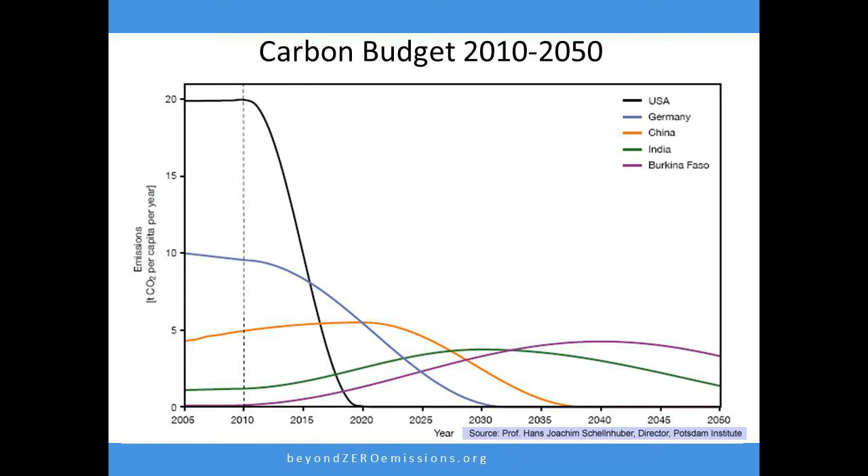Just some quick context: Angela Merkel's climate advisor, so that's the Conservatives in Germany, and the EU's climate advisor is Professor Hans-Joachim Schellnhuber. He's the head of the Potsdam Institute for Climate Research, and he actually released a paper last year where he showed that if you wanted to have a 67% chance of avoiding 2 degrees Celsius, which many say is too high, because regionally in Australia that could mean 4, 5, 6 degrees average increases, you needed to decarbonise an economy like the USA by 2020. Now Australia has the same sort of emissions profile as the USA.

So we didn't want to sit around and debate the topic because we thought it's pretty important to get on with the job. We put together a crack team of young, smart, switched on engineers, physicists, people who work in industry, they work in the fossil fuel industry, they work at refineries, they work in major engineering companies, and together they wanted to design the future that they wanted to work in.

So equally at the same time there's another group walking the halls of parliaments around the country, and they're in and out of politicians' offices, but unfortunately it's not us, it's the Can't Do campaign. And the Can't Do campaign, the oil and gas industry, the generators, the coal exporters. And they sing the Can't Do mantra, and the Can't Do mantra is that renewable energy can't supply baseload. Renewable energy is too expensive. Renewable energy will wreck the economy. Renewable energy will cost jobs.

And we've got this fantastic model just for showing off. I'll show you what that is. It's a solar thermal plant. And the big key to an Australian 100% renewable energy plan is solar thermal. And that's the real one, and that's our model, 400 to 1. So that's a baseload solar thermal plant, and I'll tell you how that works. So when I say baseload, I mean solar power all through the night, solar power around the clock. It's 24-hour solar power.

So here's how it works. A sea of mirrors, a field of mirrors surrounds a central tower. The light of the mirrors, each individually tracked mirrors, is bounced up to the top of the tower, where a fluid travels up the tower from the cold storage tank. There's 2 tanks at the base of the tower. So the liquid is molten salt, it's industrial fertiliser. It travels up to the top of the tower, receives the light from the field of mirrors, we're talking 17,000 mirrors, say, and it's then banked in the hot tank. So it starts at 290 degrees in the cold tank and arrives at 565 degrees in the hot tank. It's the same temperature that a coal-fired power plant works at.

So it's like Grandma's thermos. All the heat is stored up in a big tank of molten salt, and then any time, day or night, that you need electricity, water is run past the salt through a shell and tube heat exchanger, flashes to steam, and drives a conventional turbine, the same turbine in a coal, gas or nuclear plant. So for grid operators, it interacts with the grid exactly the same as the kind of power plant they know how to run. So it's 24-hour solar power.

Now this is what the molten salt looks like when it's not molten. This is before the big melt. It's just potassium nitrate and sodium nitrate. Here I'm holding the potassium nitrate. It's pretty safe. If you don't inject it, you're okay. Wash your hands afterwards. You don't need an EPA licence in the United States because it's industrial fertiliser, so it's accepted to use and it makes planning, fast tracking pretty easy.

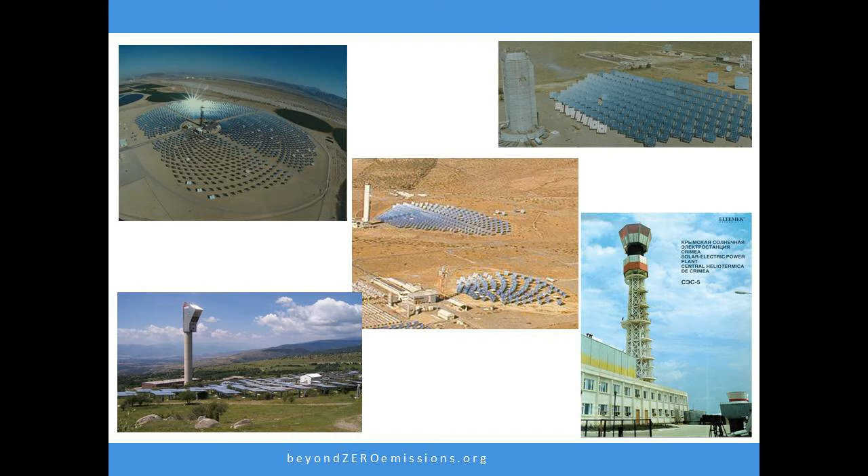So here's the point that you need to take note of. Unlike wave, there's a great company here called Carnegie, or geothermal, hot rocks geothermal, this is not something that's in test phase, development stage, commercialisation opportunity. This was prototyped in 1980. So the USSR built this really USSR-looking tower in 1978, 5 megawatts. The Americans had to one-up them by doubling it at 10 megawatts in 1981. And the French just got smart and they made a molten salt tower in 1982 and had 4 hours of storage to show that you could run it after dark.

Follow on to 1996, the US, not to be outdone by the French, added more and more mirrors and added 4 hours of storage to their test plant, their commercial operation test, and it was run together with Sandia National Laboratories. They're the guys who made the nuclear bomb in Albuquerque, New Mexico, Lockheed Martin, Bechtel, Boeing. So not hippies, we're talking defence contractors, people who sort of bomb people and on the side they do solar. Okay? So if we can encourage them to do more solar and less bombing people, it'd be a good thing.

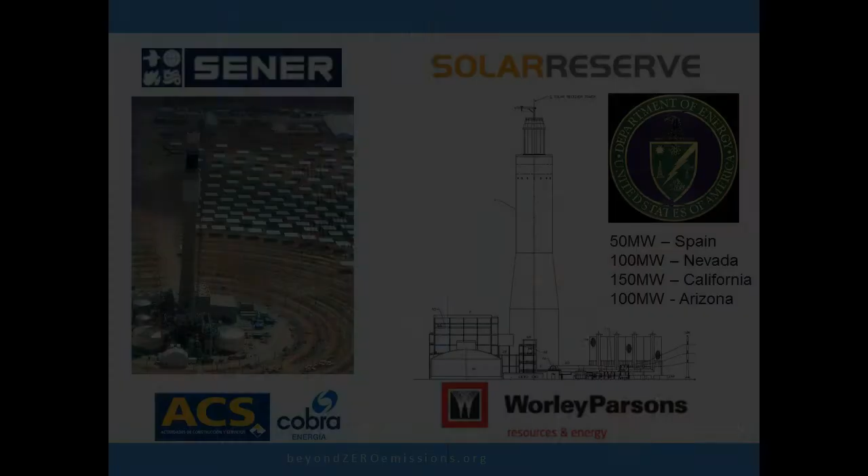So out of that, we've got Sener in Spain, and Sener is Spain's biggest engineering company. They're like Worley Parsons plus a bit of Lockheed Martin. They do aerospace and regular engineering for the oil and gas industry. And they're building the solar thermal plants in Spain out of that US Department of Energy program. And their construction contractor is ACS. And guess what? ACS owns Leighton Holdings. So it's not hard for us to do the technology transfer to Australia to build these, to start rolling them out. Because if Leighton's parent is the biggest builder of solar thermal plants in the world, then we can do it in Australia.

SolarReserve, on the other hand, United Technologies Corporation, 16th biggest company on the NASDAQ. Pratt & Whitney is the division. They keep half of the world's jet planes in the air.

If you trust Pratt & Whitney with your aeroplane flight, you can trust them with your power sector. And their engineering contractor in the United States is Worley Parsons. So another strong link here to Australia. So again, we can do it in Australia. So there's lots of companies.

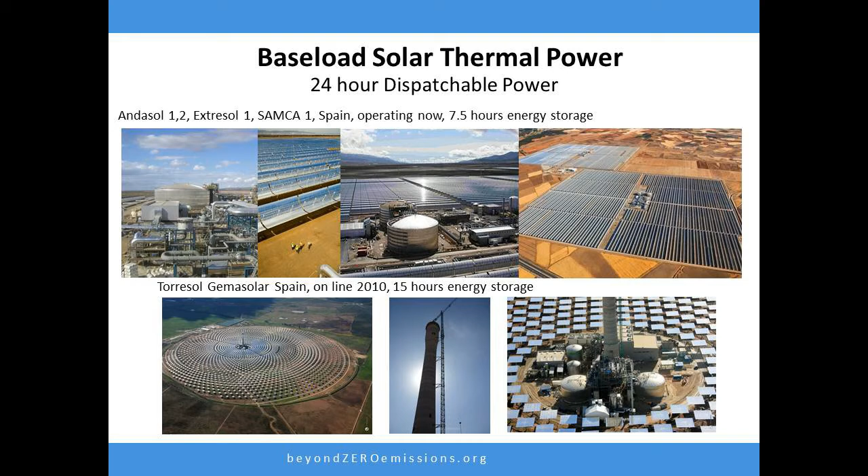There's about 10 plants operating with 7.5 hours storage. They're called parabolic troughs. They don't work so well in winter, further away from the equator. So we've gone with plants like Torresol's Gemasolar, which is down the bottom here, which supports 15 hours storage and has a 75% annual capacity factor.

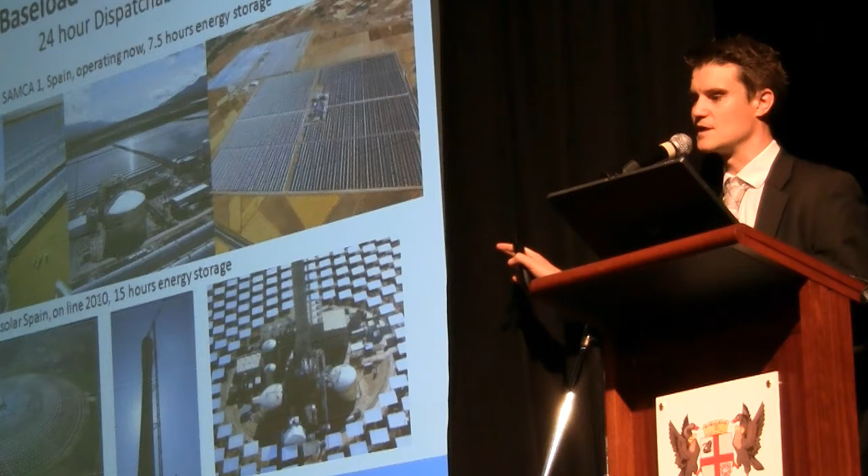So to compare that to, say, New South Wales black coal plants, they average 63% capacity factor. These plants do 6,500 hours out of 8,760 hours a year. So this is more base load than New South Wales black coal plants. So it runs around the clock most of the time, take it out for maintenance and so on.

So they've moved away from photovoltaic and into solar thermal. And they want that dispatchable power. They want the 24-hour ability to provide the complementary power to wind. $20 billion over the next 3 years. This is not tut-tut a few solar panels on a local school. This is a major industrial mobilisation.

So we wrote the Stationary Energy Plan to show you can do it. It's endorsed by the former Chief of Defence, Peter Gration, by Robin Batterham, the former Chief Scientist of Australia under Howard, and many others. And here's a quick rundown of the actual energy that we deliver in 2020. You can see our starting point here. The blue area is existing electrical services like the aluminium smelter and the projector, and we have a major energy efficiency program which we're writing about currently in our Buildings and Transport Plan.

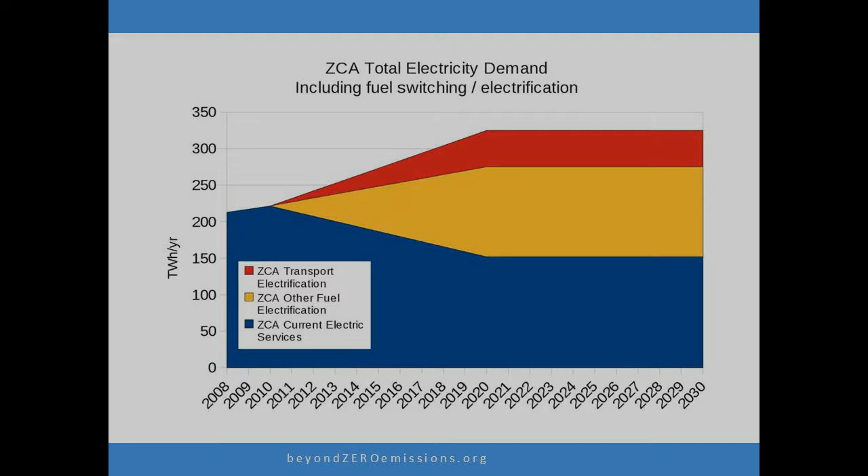And that energy efficiency program allows us to reduce our absolute delivered energy out to 2020, so we're mining savings in energy. We'll still be using more energy per head of population than Germany in 2020. Now you might think, well, those Germans live in caves, if a Mercedes is a cave, and they've got the second biggest car manufacturing industry. They do aluminium smelters, they've got steel mills, so they're a big industrial, diversified economy. They can be very powerful and very heavy industry on less energy than we'll be using under this plan in 2020, so we can do it too. We're not that hopeless, right? I mean, we might have a complex, but I don't think we're that hopeless.

So here in the yellow is other fuel electrification. That's switching our current gas, space and water heating and industrial heat to electricity. So we're using renewable ambient heat or heat pumps. So you buy 1 bar radiator worth of heat and you deliver 5 bar radiators worth into a premises using the best Japanese high efficiency heat pumps and so on. And that's the orange sector.

And in the red sector, it's transport electrification. It's rolling out new rail in our cities, significant rail rollout, not seen since the turn of the century, using modern 100-man equivalent automatic track laying machines and electrifying our vehicular fleet. So upgrading our car manufacturing plants to build pure electric or plug-in hybrid electric vehicles.

So we're actually delivering more electricity in 2020 overall, but that's because we've now accommodated all energy. That's the 3 sectors: the liquid fuels for transport, which is currently oil and gas, the gas used for space heating, domestic and industrial, and water heating, and the electrical services.

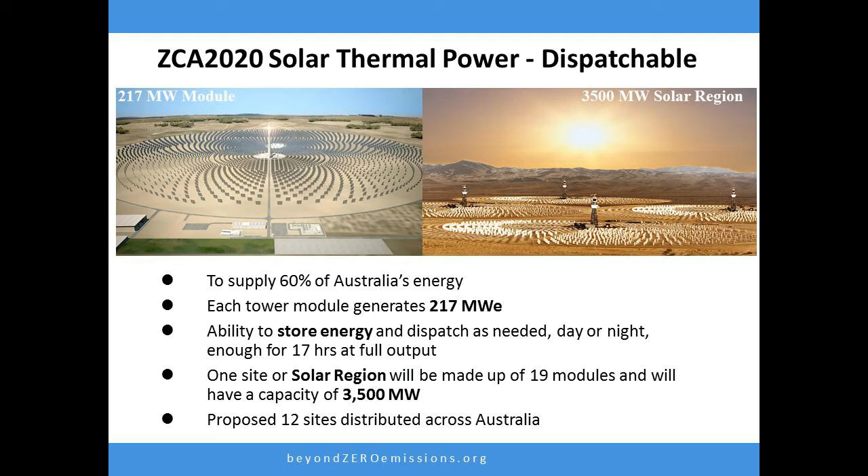So here's what it looks like. 60% of Australian energy from molten salt power towers. Think of a huge smokestack without the smoke coming out of the top. Think about 19 of them in a solar region like Kalgoorlie, where we're going to speak about this tomorrow night. 19 towers. Currently, if you go to Latrobe Valley in Victoria, there's 22 towers with smoke coming out of the top. This is a region, 12 around the country, 19 towers, surrounded by a sea of mirrors.

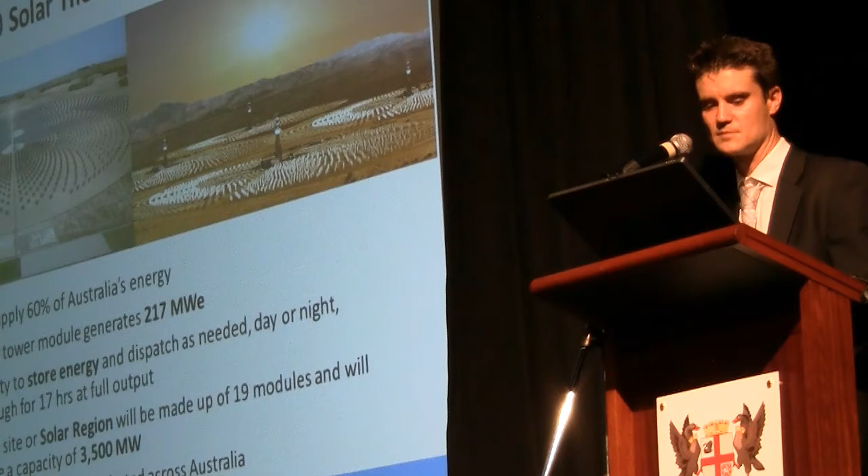To give you an idea, from the base of the tower out to the perimeter is about 2 kilometres. So if you go any further than that, not enough light strikes the tower, and that gives you a 217 megawatt net tower. Or to compare it, people always like to quote the gross amount, 250 megawatt tower. So each module, each region will have 19 of these towers, 12 across Australia.

On the wind front, just 6,500 turbines at 23 sites will give us what we need. These are 7.5 megawatt wind turbines from Enercon. They're about 3 times the size of what's currently installed in Australia. And I'd argue you go with the biggest turbine because there's no reference on the horizon. A big turbine's a big turbine's a big turbine. Why install 2 megawatt ones when some sectors of the economy don't like the look of them, when you can install a 7.5 megawatt one that looks exactly the same and produces 3 times the power? Because your eye can't tell the difference.

So 6,500 of those, and each wind region would have 2,000 megawatts, or about 270 to 400 turbines. We've already got proposals for wind farms that big in Australia. And this is what 7.5 megawatt turbines look like. Like I said, they look pretty small. There's me in the foreground, and they're a couple hundred metres behind me. And I really like them, actually.

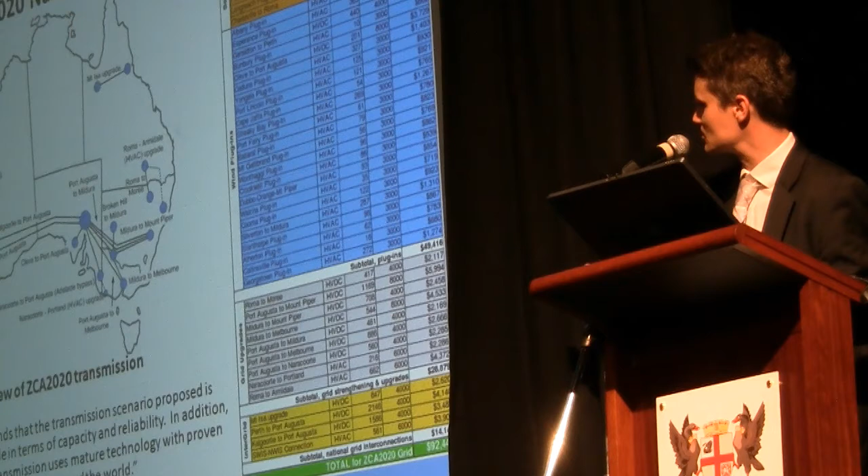And we designed a grid with Sinclair Knight Merz, and they did a review of that, and you can see that we've linked the west to the east. Currently in the East Australian grid, electricity flows south from Queensland, where they've got a surplus of energy generation, towards Victoria and South Australia. Under this system, we're actually sending the power from the west into the east, with net generation in the west, and we're exporting towards the east. And we basically showed that you can cross the Nullarbor and only lose 3% per 1,000 kilometres using high voltage DC cables. So pretty good efficiency there. Now version 2 will be reviewing that and seeing if we can optimise our transmission system.

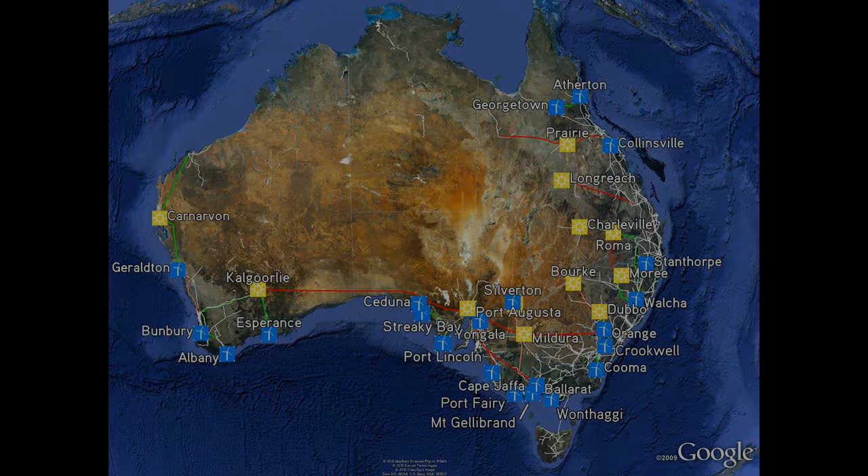So this is the energy system I'm saying for the whole of Australia that we could have in 2020 if we chose to do so. So that's our choice. If we choose to do it in 2025, we could do it as well. If we run the project out too long, we lose economies of scale and the price goes north. You've really got to build them like you build roads. One project after another, so your workforce moves from project to project to project. You save 30% by doing that.

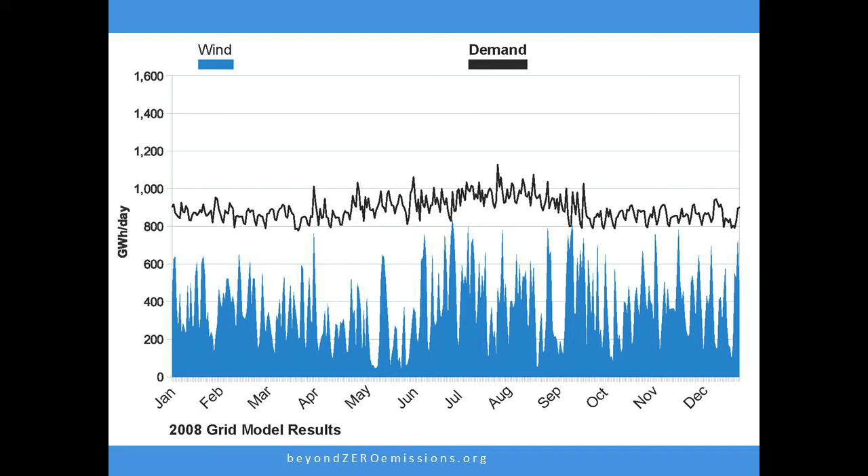And so here's the modelling. That's our demand, scaled up to 2020 with all that extra liquid fuels conversion to electricity, with all the ambient heat driving the heat pumps. There's wind coming in as the first dispatch. You take it as soon as it's generated. There's the firming power, the energy security you get from the solar thermal with storage that's available on demand dynamically, like a gas turbine or a hydro dam, but of course renewable. The existing hydro, very small amount. And some bioenergy backup where we're co-firing the molten salt tanks.

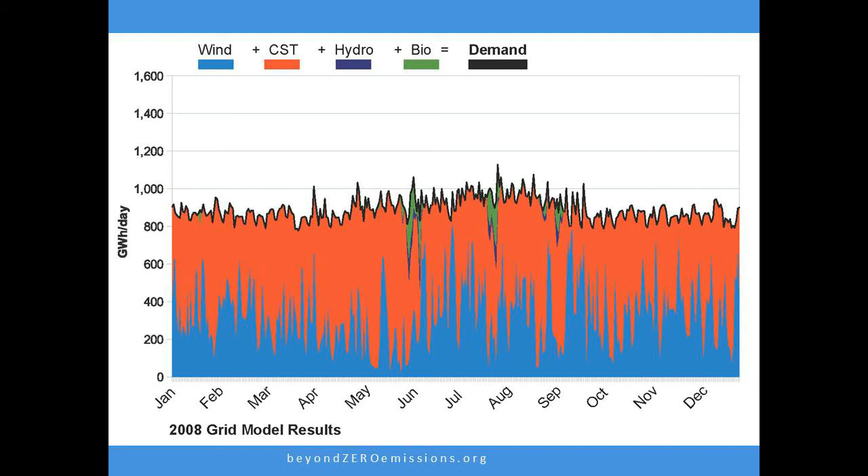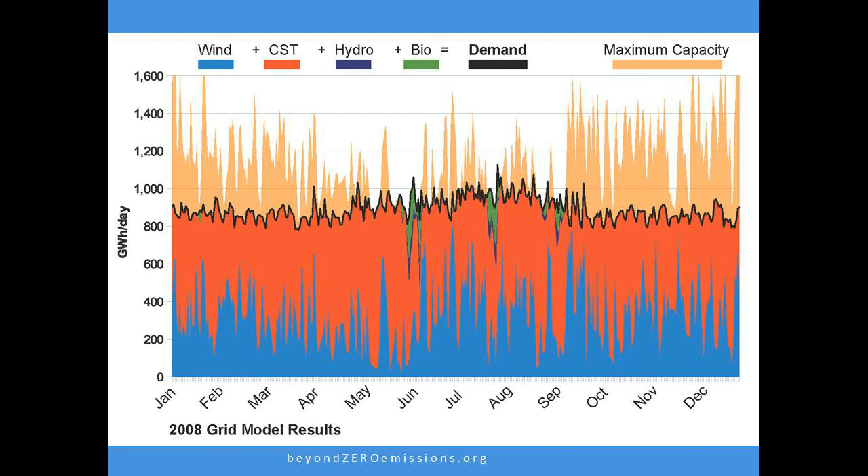And we haven't been fair to the system because we only got wind data from South Australia, Victoria and Tasmania at hub height for our first generation of this plan. In the next generation of the plan we're adding WA, New South Wales and Queensland, which will probably eliminate or near eliminate that bioenergy co-firing of the molten salt in winter. And this is the excess, so we had to overbuild the system in order to meet the winter peak, and that's 25% of the power that we can't use. So if we can optimise this in the future to eliminate that excess, that'll reduce the overall costs.

And one option there is seasonal storage using pumped hydro between existing dam networks, such as in Tas and Snowy, and if there's any opportunities in WA. So we said it's a big manufacturing and construction job.

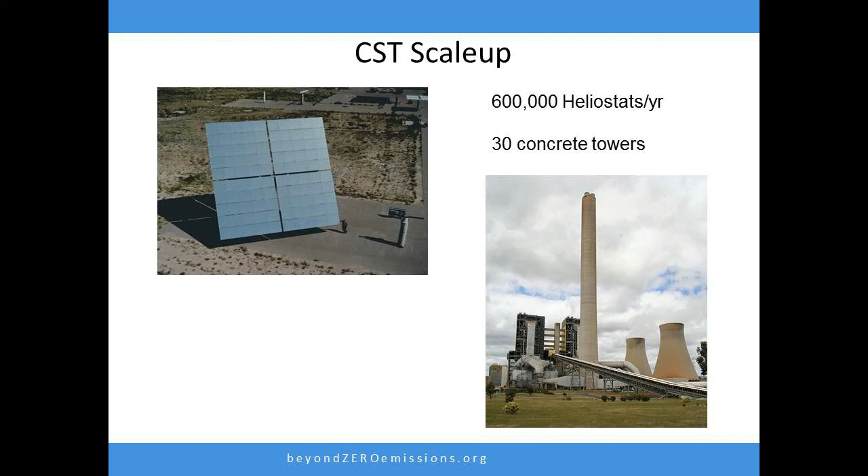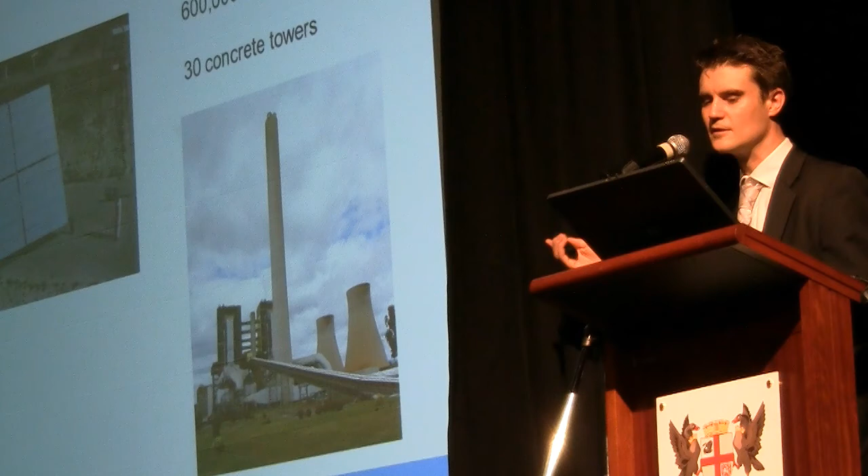CST scale up, 600,000 heliostats or big mirrors a year. We sell 1 million cars a year. A car's a hell of a lot more complicated than a single mirror. 30 concrete towers, takes about 6 weeks to continuous pour one of those towers like this Loy Yang power station in Victoria, same height, same sort of tower, maybe make it a bit prettier, but that'd be the go. And about 30 people will do one of those.

4 of these Enercon factories, it took 1 year to tool up in Portugal. Equivalent of that will get the job done. We did a detailed labour requirements study and found that we'd only need a peak of 70,000 construction workers. Before the GFC, Australia's construction industry was growing at 50,000 per annum. So we could easily provision a peak of 70,000 construction workers to work on this over a 10-year period.

And in terms of operations and maintenance, it's twice the amount of workers provisioning energy to our domestic energy sector today. So twice the amount of workers, but we're saving on fuel because we don't have international price parity anymore. We're not linked and beholden to what Colonel Gaddafi does in Libya. We get to control our energy destiny by using free fuel from the sun and the wind.

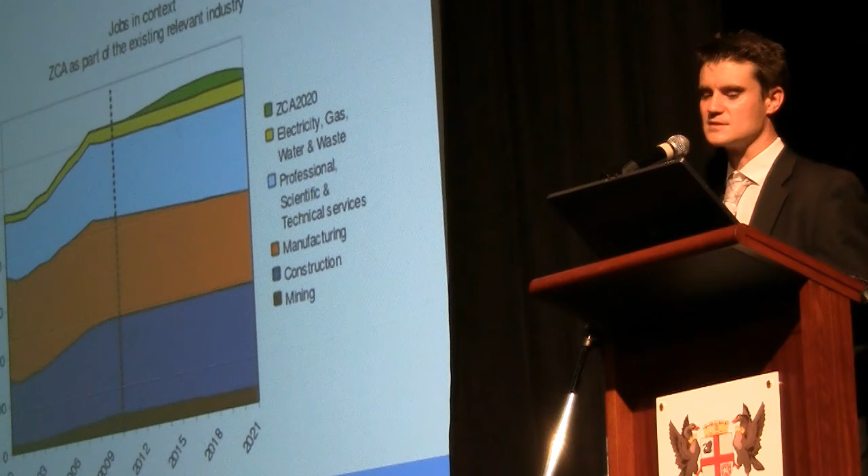So 190,000 jobs currently in mining and energy in the ground at the bottom versus 1 million in construction. So let's put it in context. The ZCA 2020 plan at the top, peaking at 170,000. So, you know, it's pretty similar to what's going on in mining and energy, and pretty good for our future prosperity.

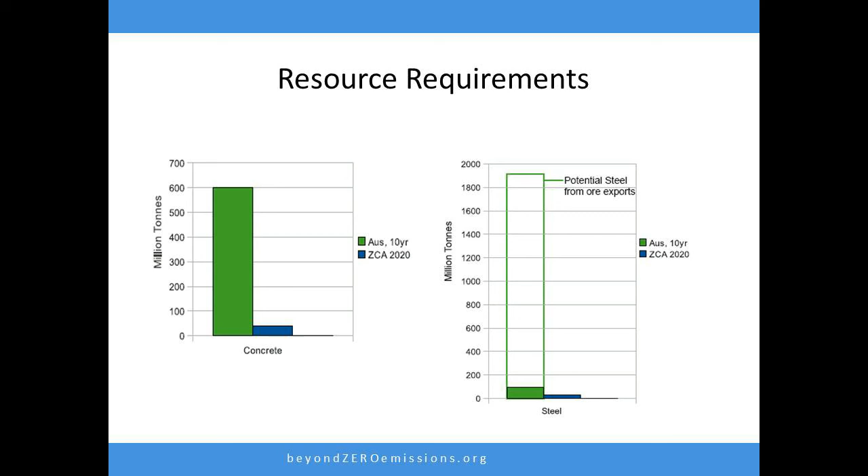We did a detailed resources requirement. 8% of the nation's concrete would be required, so expand concrete production by 8%, or we find 8% savings. Steel, about 20%. But if you take into account our net steel from iron ore exports, it's like a sliver. So we can easily do that.

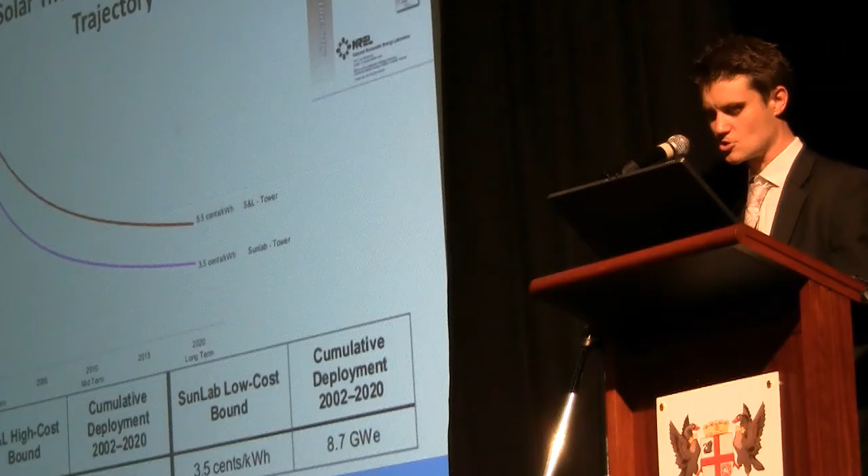We used the cost reduction curves of the US Department of Energy to show what would happen when you start building plant after plant. We took into account exchange rates, labour costs, and of course what's going on internationally with the rollout of solar thermal already.

So basically, the project's a $370 billion project, $37 billion per year. It's less than 3% of GDP. It's what we spend today on insurance. This is insurance for our safe, energy secure, climate secure future. And at $37 billion a year, it's less than what we spend on new cars at $54 billion a year. We can do this.

It'll expand the economies in ways we wouldn't imagine, and give us many opportunities to move into emerging markets in Asia, the Middle East and North Africa. Today, Worley Parsons, SKM, companies like that build the world's fossil fuel energy infrastructure. If we don't do this at home, they may not have opportunities to build tomorrow's infrastructure. So we need to learn through doing, because we've really been a part of the global 20th century fossil fuel boom, and we don't want to miss out on the 21st century boom.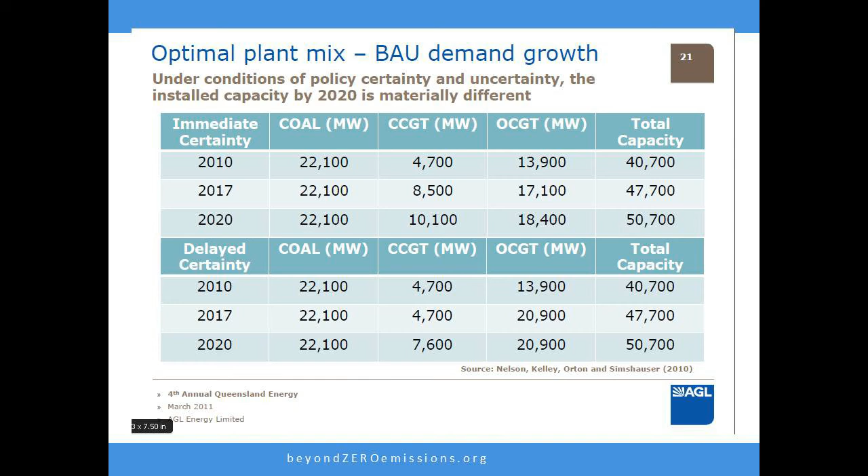So at the moment, it's a case of gas or renewables. Plans, here's AGL's spreadsheet saying we're going to get 10,000 megawatts of combined cycle gas turbine. That's base load gas by 2020 under a $25 to $70 tonne carbon price.

We've got to choose whether we go a gas future, which is just a straight carbon price, or a renewables future, which is a carbon price just to block out the coal at $0 to $20, but the heavy lifting, the real work, is done by the renewable energy feed-in tariff, which has been so successful to get us 18,000 megawatts of photovoltaic, almost Australia's entire eastern seaboard generating baseload capacity in PV.

It's managed to get solar thermal plants rolled out in Spain. It's got massive cost reductions in those technologies so that people in China, in Nepal and places like that can now afford medicines in remote locations, because that photovoltaic has come down so much due to that aid program that Germany executed in country, and that is the feed-in tariff.

So we can help ride the cost reduction curve. The heavy lifting's already been done by Germany and Spain. It's time to get on with it and to be part of that move of the global economy, the 21st century economy, and Australia should be a part of it.

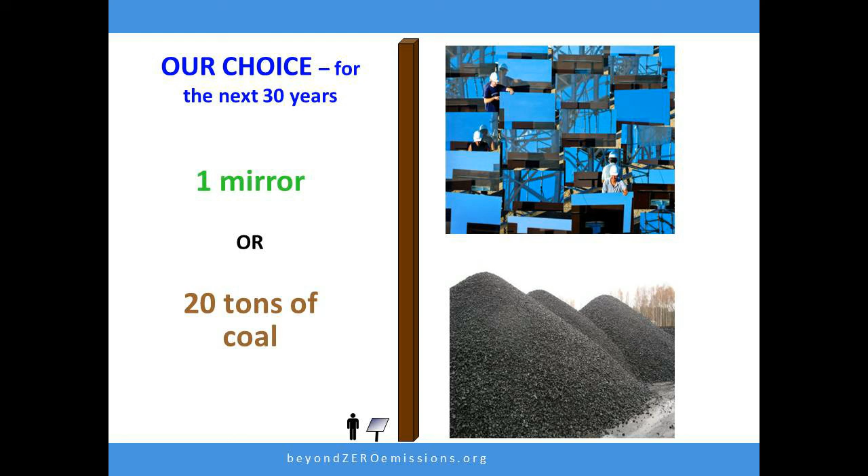So in parting, I'll just say it's our choice. We can install 1 square metre of mirror surface and not burn 20 tonnes of coal. Or to put it another way, we can choose to burn 20 tonnes of coal and not install 1 square metre of mirror surface.